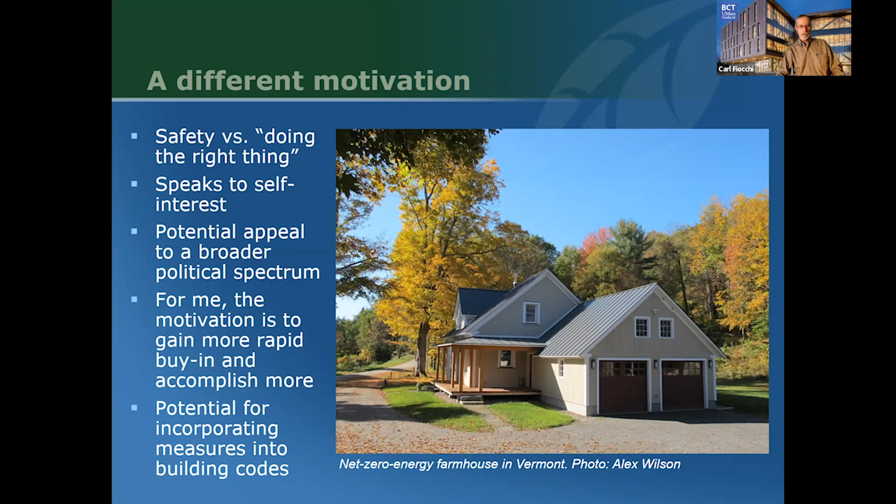Okay, so I'm going to go through some of the major impacts we are looking at with buildings and what to do about it. This is going to be pretty elementary for a lot of you, but it's a good way to review what's going on.

So first, looking at wind, designing for extreme wind. I like to show this slide. This is up in the Adirondacks, and in addition to writing about energy and the environment for years, I've written a series of books on quiet water canoeing and kayaking, and have spent a lot of time in the outdoors.

Back in 1995, we were on a canoeing trip in the St. Regis Wilderness area in the Adirondacks of upstate New York. Our last night, we'd been out about 7 days, with 2 young daughters, my wife, and another friend.

This storm came up, and my wife and I were getting ready to go out for an early morning paddle around 5:30 in the morning, and we hear thunder in the distance, and thought, that's really odd. Who's heard of a thunderstorm at 5:30 in the morning? So we debated going out and letting it pass over, but being prudent and safety conscious, we decided to pull the boat out of the water and go back to the tents.

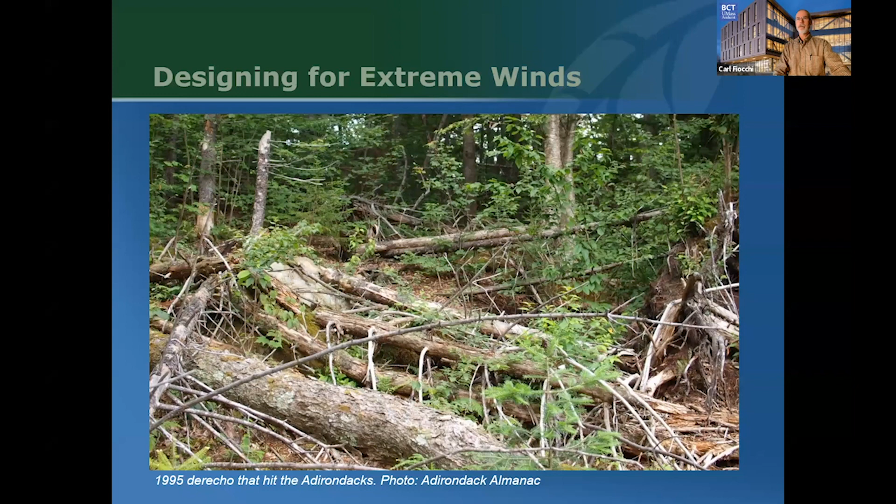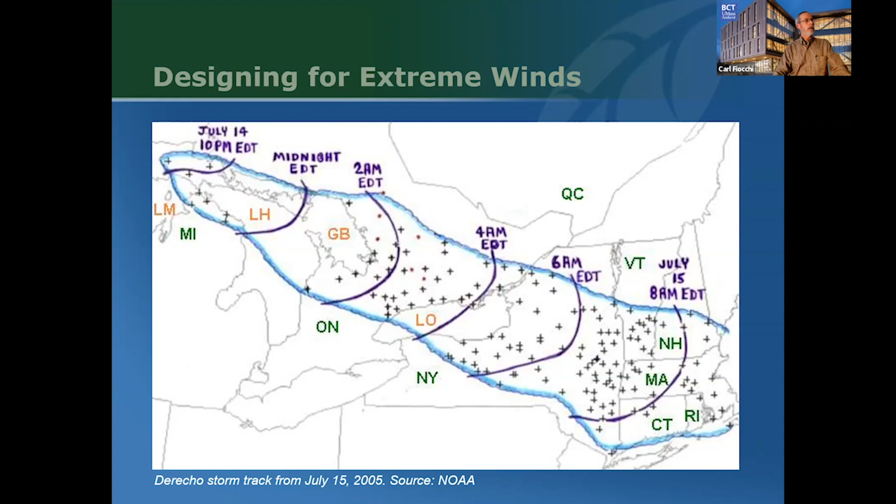It's what's called a Derecho. Until that event, I didn't even know the term, but it's a massive thunderstorm event that extends across the country. This particular storm had started in the Midwest, upper Michigan, and moved east over the span of a day. It affected Western Massachusetts very heavily and Vermont, but it really helped me wrap my mind around the need to design for wind.

So what do we do in designing for wind? I'm not going to spend much time on this, but there are a lot of easy strategies that any structural engineer will tell you about: hurricane strapping, tie-down components on light frame construction. We can look at more wind-resistant geometries, hip roofs, for example, rather than gable roofs.

Interestingly, some of the strategies to minimize wind damage, like shorter overhangs on buildings, contradict some other benefits of overhangs. I like a wide overhang to keep rain away from a building and improve its durability, and help prevent moisture from coming in through foundations. But from a wind uplift standpoint, a thinner overhang is preferential.

We can look at materials, higher strength roof sheathing, the nailing schedules or screwing schedules on panel products, exterior shutters on windows. Some of the innovative building systems like mass timber and timber framing are highly resistant to wind, very strong buildings. There's various standards we can look at, such as the fortified standards from the Insurance Institute for Business and Home Safety, IBHS, and some of the engineering codes that exist.

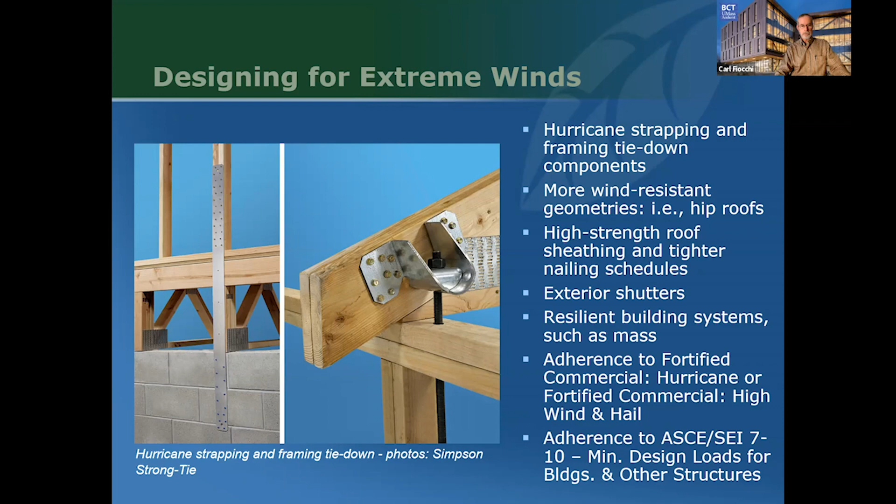Tornadoes are another form of wind, and for the vast majority of buildings, other than some emergency management buildings, we can't really be expecting to design buildings that will withstand 250-mile-an-hour winds that may be experienced in tornadoes. So with tornadoes, we instead tend to look at safe rooms, spaces within buildings that can provide a safe refuge.

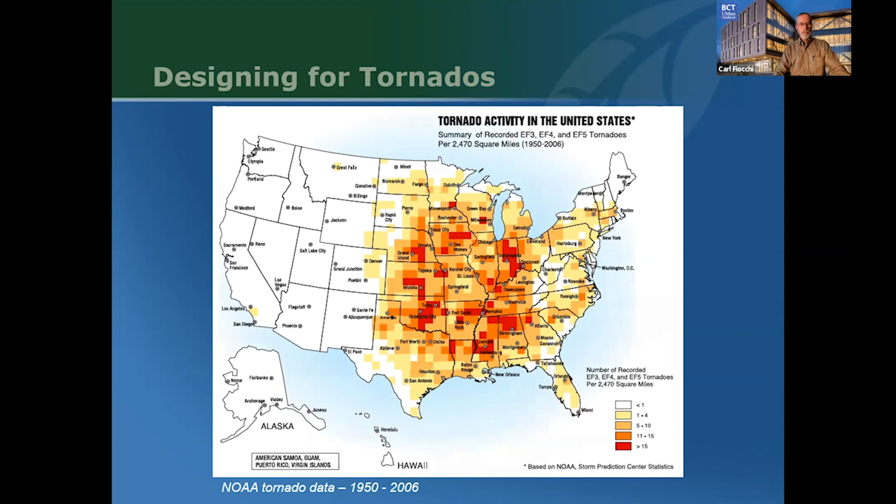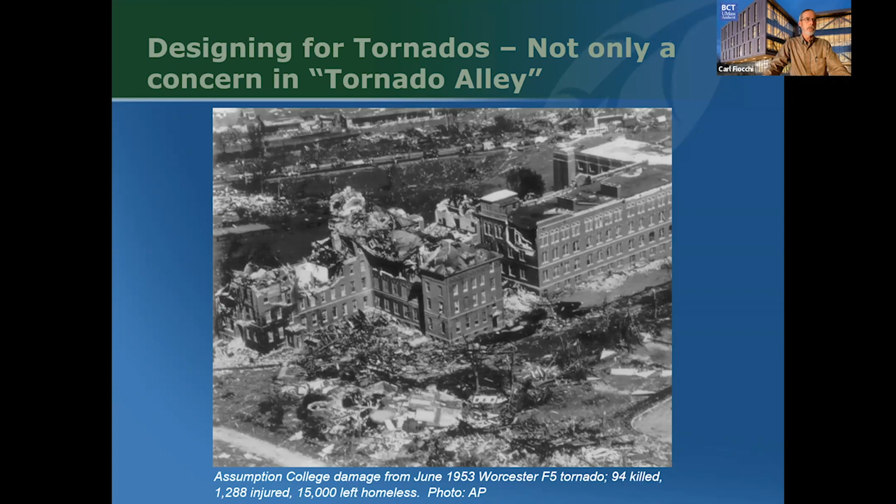So safe rooms, there are excellent standards from FEMA, the Federal Emergency Management Agency. There are also various companies that pre-manufacture safe rooms. They can be cast concrete, they can be metal fabrication, or safe rooms made with reinforced textiles, Kevlar type materials.

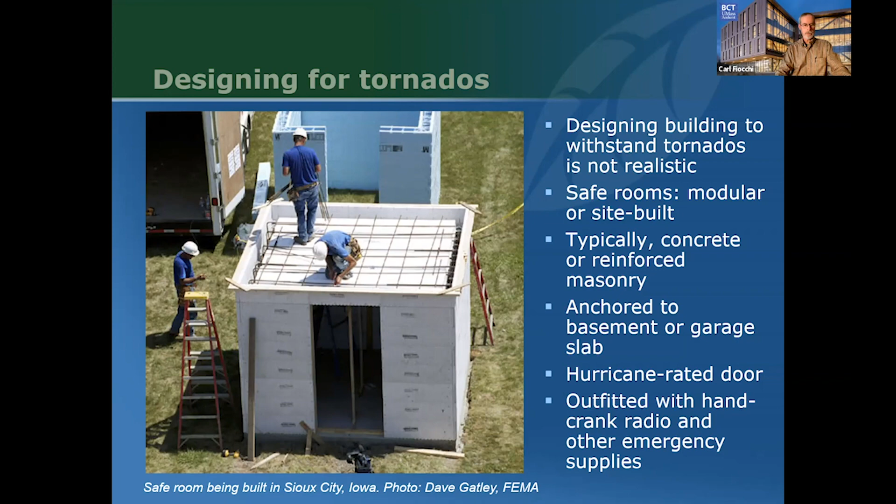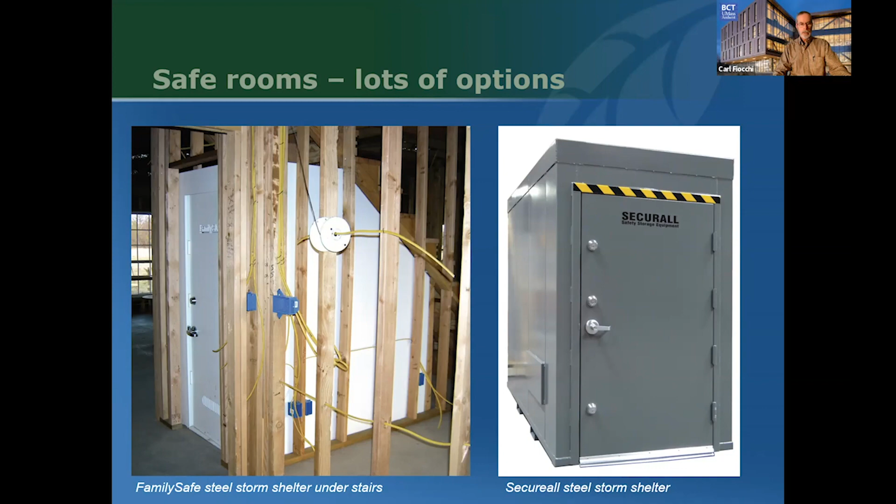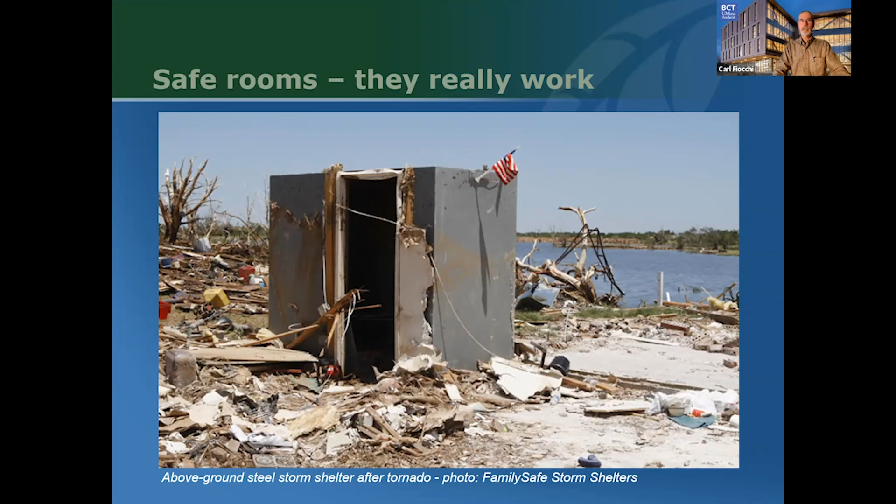Next up is flooding, something we need to think about not only in coastal areas where we have storm surge and sea level rise, but inland areas as well. Western Massachusetts and Vermont, where I'm based, was heavily impacted by Tropical Storm Irene in 2011.

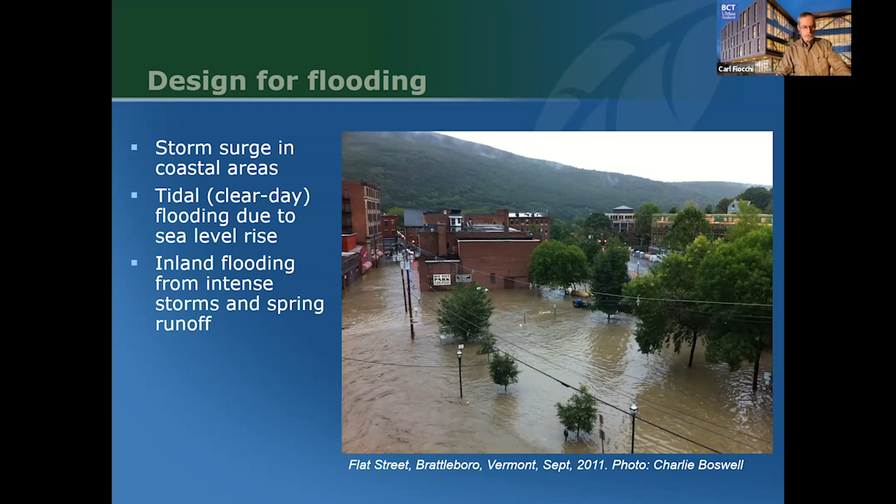Significantly, when that was built, they knew it was in the floodplain, but the lower level of the building was above the FEMA-designated 100-year flood elevation. It was out of that elevation, so they didn't technically need to do anything. But the civil engineer on the project—and I was working on this project during design, for energy reasons—thought that even though this is above that 100-year flood elevation, if the Whetstone Brook floods, we're going to exceed that. So one of the features they incorporated into this building are flood barriers on all of the exterior entryways.

They're tracks that are permanently installed, and the last person to leave that Sunday morning deployed these aluminum panels that fit into these channels and get tightened into place. Lo and behold, the stream did flood its bank and came within 1.5 inches of the top of those flood barriers. So that simple feature, which probably added a couple thousand dollars to the cost of the building, saved probably a couple hundred thousand dollars in damage had that building been fully flooded.

It's the kind of feature that can very easily be value engineered out of a building, because it's seen as an optional expense. It's not required by code, and it's not adding an amenity that occupants are going to recognize unless some problem comes up. But the owners had the wherewithal to stick with it, and certainly have benefited from that. They did go back and add another 4 inches to the freeboard on these, looking at the potential for future flooding.

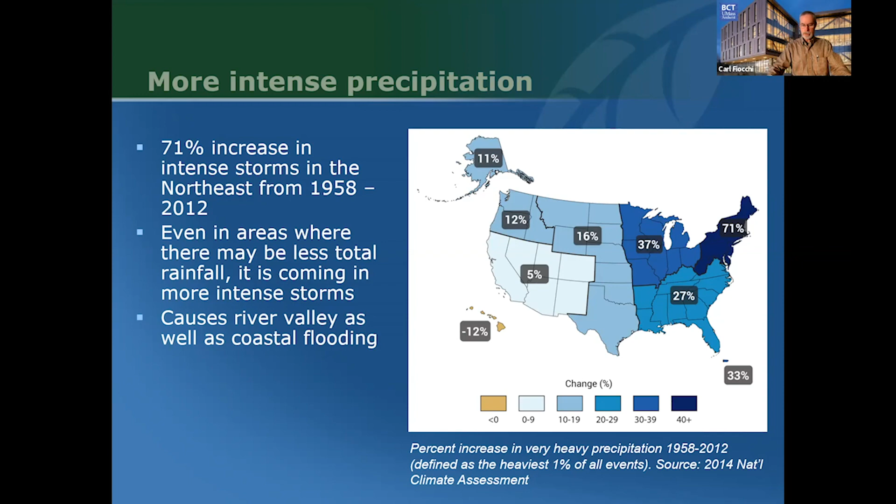Flooding like this isn't limited to Florida. Along the eastern seaboard and parts of the West Coast, we're also going to see significant changes to the coastal zones. Interestingly, in this part of the country, the inland Northeast, we're among the best off when it comes to the changes expected over the next 50 to 100 years. So a lot of people looking ahead are expecting climate refugees coming to Western Massachusetts and Vermont from New York City or coastal New Jersey—areas that are going to be increasingly flooded.

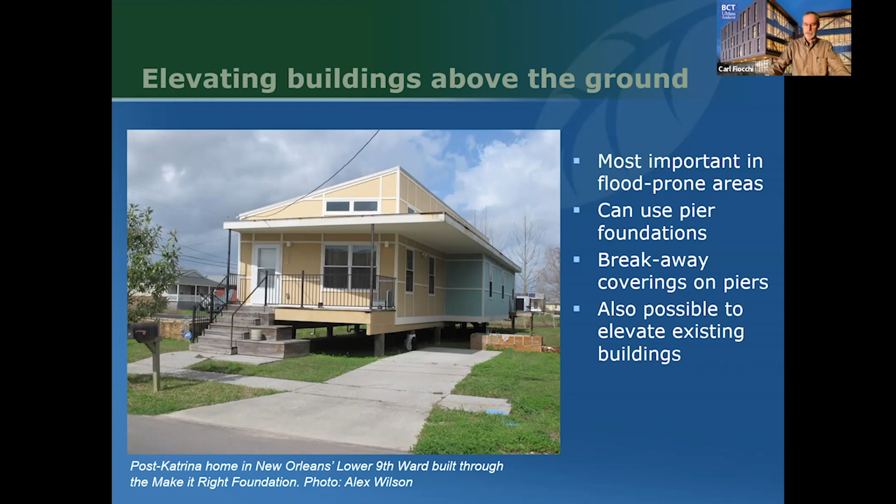Using pier foundations, using breakaway walls that protect these underfloor areas, so that if floodwaters do come through, they don't take down the building, they simply flow past the partitioning. In addition to elevating buildings, we can look at elevating mechanical equipment, whether it's mechanical equipment outside the building or inside the building.

With Superstorm Sandy in 2012, New York City saw extensive damage to mechanical equipment in basements. Since that time, there's been a lot of effort to elevate that equipment, either into penthouse floors or rooftop locations.

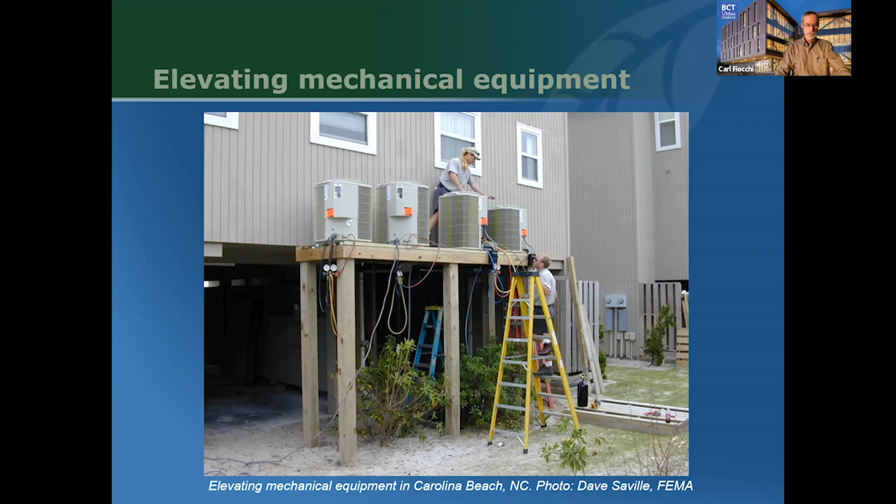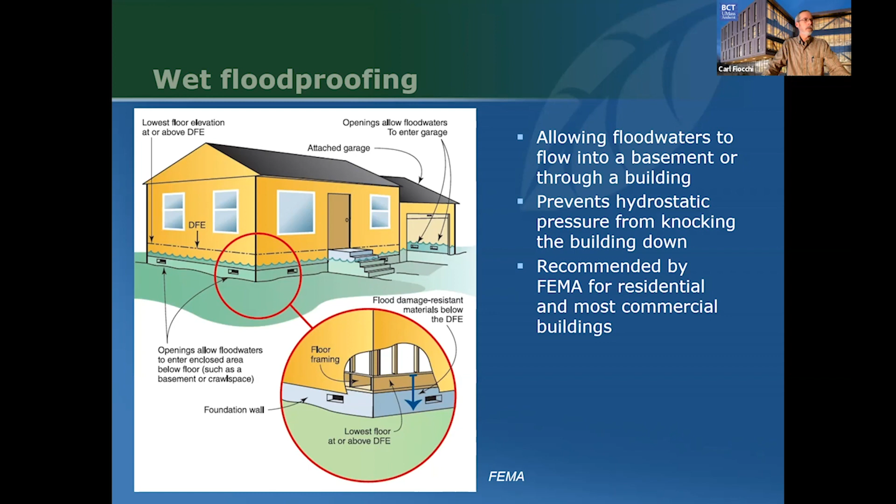With flood design, we talk about wet flood proofing and dry flood proofing. Wet flood proofing is kind of a funny term - it seems like an oxymoron, but it's flood proofing that's designed to let spaces get wet. So allowing floodwaters to flow through a building, whether it's through a crawl space or even a first floor of a building. What that does is protect against the hydrostatic forces that work against a building from knocking it down. FEMA really recommends wet flood proofing in most residential applications and in a lot of commercial applications. Unless a building has been specifically designed to withstand those hydrostatic forces, wet flood proofing is typically the desired method.

One of the strategies is these intentional openings that equalize pressure within a building. These flood vents, made by a number of manufacturers, have a normal position that's closed, but if floodwaters rise, the vents lift out of a channel and are able to pivot back and forth to let water flow in or out.

So an ingenious system to, in normal conditions, keep rodents out and provide security, but if there is a flood event, allow that movement of water in and out, which equalizes pressure. I've talked to people at FEMA about this, and with Sandy in particular in New York City, where there are thousands of row houses and walk-ups that are 4 to maybe 8 stories tall, often brownstone buildings - those are unreinforced masonry, and FEMA's very worried about those.

If we do a lot of work to keep those floodwaters from filling up those basements during a flood, there's a lot of risk that the buildings could come down. Significantly, when so many buildings' basements were flooded during Sandy, the strategy to fix that isn't necessarily to go right out and pump the water out. That has to be done very carefully, dewatering all of those basements at the same time. If one gets dewatered, the hydrostatic forces on the basement next door could knock that partition foundation wall down. So a significant issue with wet flood proofing.

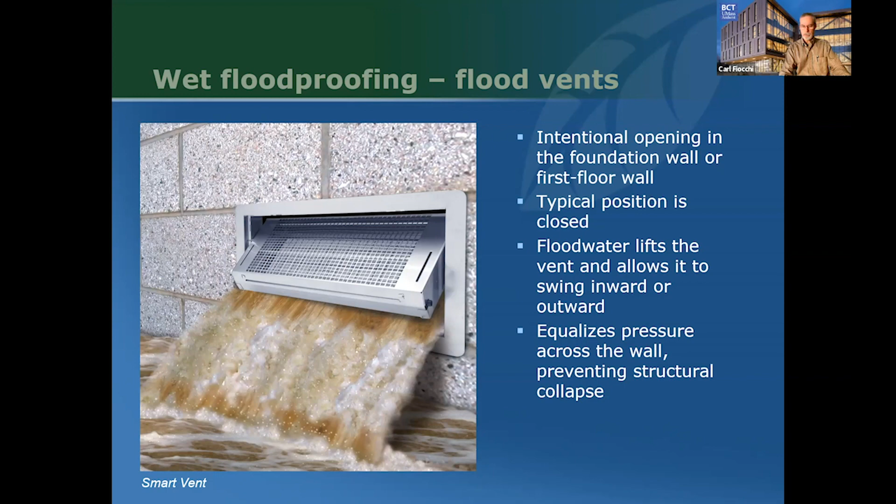We also, with wet flood proofing, want to look at wettable materials. By that, we mean materials that can get wet and dry out again without having to be replaced, like polished concrete, where the structural floor slab becomes a finished floor. It also offers cost benefits to using structure as finish.

Wall materials that are tile or brick, or gypsum - fiberglass clad gypsum instead of paper faced gypsum board. These types of materials can save a lot of money if a building gets wet. If a cellulosic material gets wet, it usually has to be taken out and thrown away, dumped in a landfill, because of mold growth that happens within a day or two of a flood event.

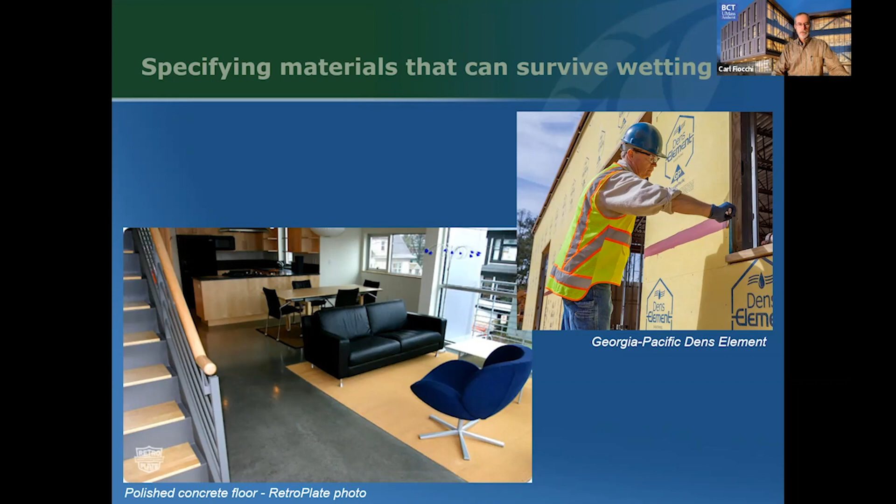Okay, so now dry flood proofing, and that's this idea of keeping water out of a building. There are places where that makes sense, and there are a lot of buildings where it's okay to keep a little bit of water out - a foot of water or so, as was done in that building in Brattleboro that I showed off.

This pictured here is a commercial building in Providence, Rhode Island, an older building where they retrofit these channels to be able to apply these flood panels in advance of a flood.

In buildings being built new, the entire building can be engineered to withstand, to protect, several levels of sub-basement, keeping water out. But those have to be engineered for that use right from the start.

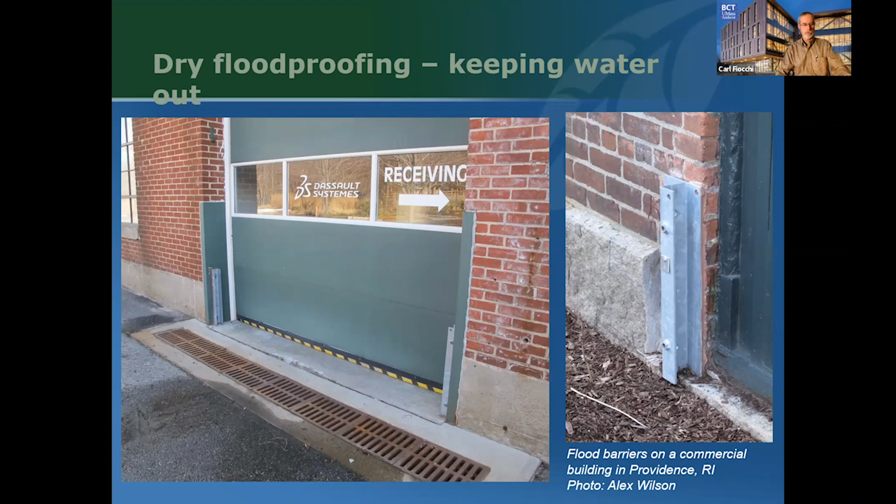Flood proofing guidance, FEMA has great stuff that's available free. FEMA's been one of the most amazing resources for decades, just a wealth of information in their library resources.

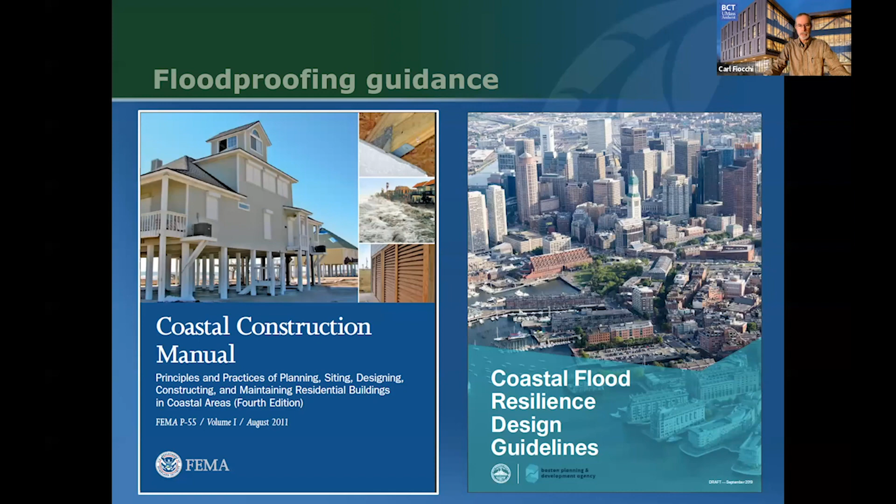Boston has this coastal flood resilience design guidelines that came out a couple of years ago. Really good stuff, and I'd urge you to take a look at that. That's from the city of Boston.

Okay, next up is wildfire. Wildfire is certainly something we've been hearing about a lot over the last five years, particularly in California.

At the end of last year, that devastating urban firestorm in Colorado made the national news and front pages. Very quickly, in a matter of an hour or two, it took out close to 1,000 homes.

But more common is wildfires, not in suburban areas, but in areas that have been developed that are an ecosystem typically managed by natural fires, lightning-started fires. We're building in places where maybe we shouldn't be building because of that vulnerability to wildfire, but we're doing it. And there are ways we can learn to do it better.

This map shows the wildfire activity over the last 20 years or so, from 1994 to 2013, by county. You can see the risk is largely in the west, or it's greatest in the west. But as precipitation patterns change, there might be more times when we're dealing with drought and wildfire, even in the eastern part of the country.

So in terms of what to do about it, I mentioned IBHS earlier, the Institute for Business and Home Safety. That's the research arm of the insurance industry, the home insurance industry. And they've done really good research on fire safety and fire-safe building practices.

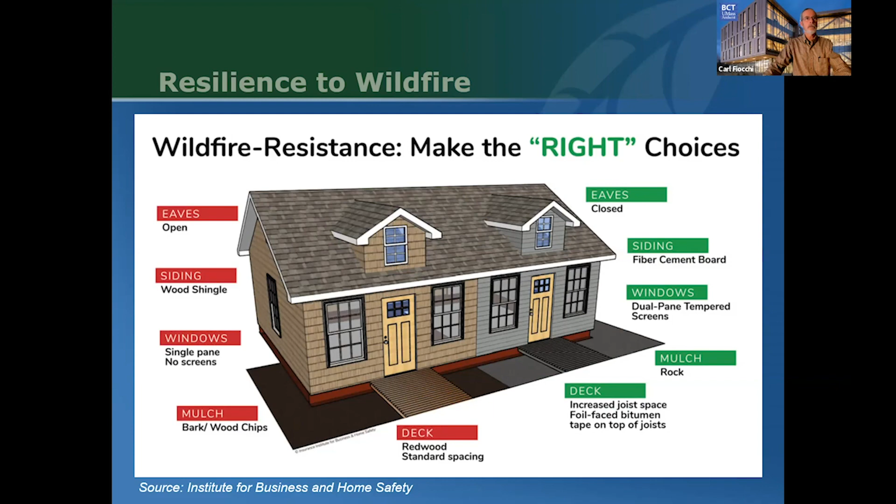This slide, you probably can't read too well, but it's just a sampling of strategies. A lot of people assume that homes burn down in wildfires because the fire comes right up to the building and catches it on fire. More typical is that embers, well in advance of a wildfire, get swept up through soffit vents in the roof at the eaves and catch the building on fire from the inside. So there are simple strategies for preventing that with proper ember-excluding screening on eaves.

IBHS in South Carolina has an amazing research facility that I haven't yet visited, though I'd love to check it out. They can build a full-size house in this big test chamber and then expose it to all kinds of impacts of Category 5 hurricane, driving rain, very high wind, and wildfire. This is a test case, a building they built where half of it was built to standard practice and the other half built to more fire-conscious standards. Then they can expose it to these fire conditions.

You can see in the lower right, it's kind of hard to see, but there are embers being shot at the house. There's an ember generator - I don't know how they do that - but it's blasting the house with these airborne embers in high wind.

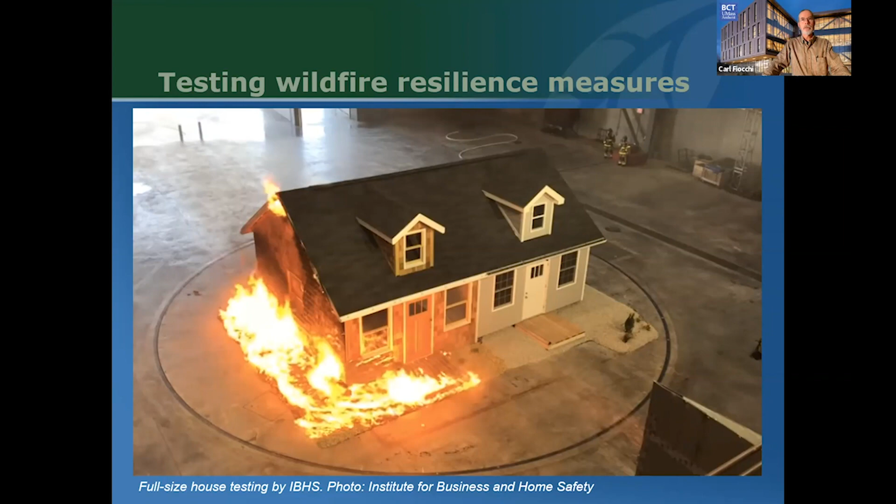So examples: open eaves pose a greater fire risk than if they're boxed in. Very significantly, wooden decks are a very common cause of structural fires in buildings. Open decks tend to accumulate a lot of debris, vegetation will grow under them and then die, leaves will accumulate. And again, these embers, well in advance of a fire, land under that deck, catch it on fire, and burn the house down. So there are smarter ways to do that.

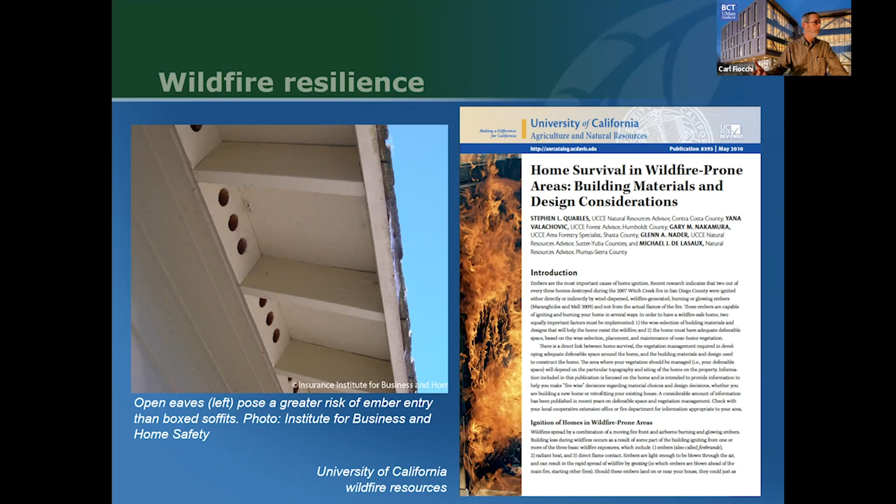And there's some great resources. University of California, Berkeley has very good resources in firewise design. And it's not just the building, it's the way the landscape is managed to minimize fire risk.

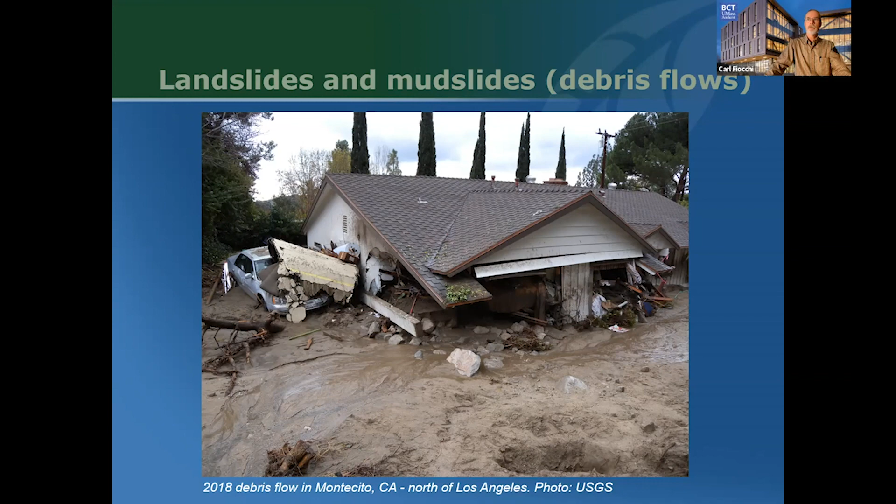Landslides and mudslides, sometimes called debris flows, are very commonly a secondary impact of wildfire. An area gets affected by a wildfire, and then weeks or months later there's a heavy precipitation event, and the soils are destabilized because the trees growing on them have been killed or disturbed. Then you get massive debris flows, like this one in Montecito, California, which was very much in the news in 2018 - I think there were maybe 20 people killed during that event. It came down very suddenly. We hear a lot about mudslides in other parts of the world, less developed nations, but they happen in the US as well.

Fortunately, there are now some resources where the US Geological Survey is doing mapping of debris flow risk. This was an image I showed at a workshop we participated in in Malibu, California, after the wildfires there, developing strategies for the rebuilding that would happen, and how to reduce the fire risk. This map shows relative vulnerability to debris flows, but it's generalized a little bit - it's very localized depending on the slope and the valleys and so on. But there is now, just within the last few years, much more focus on this by the U.S. Geological Survey.

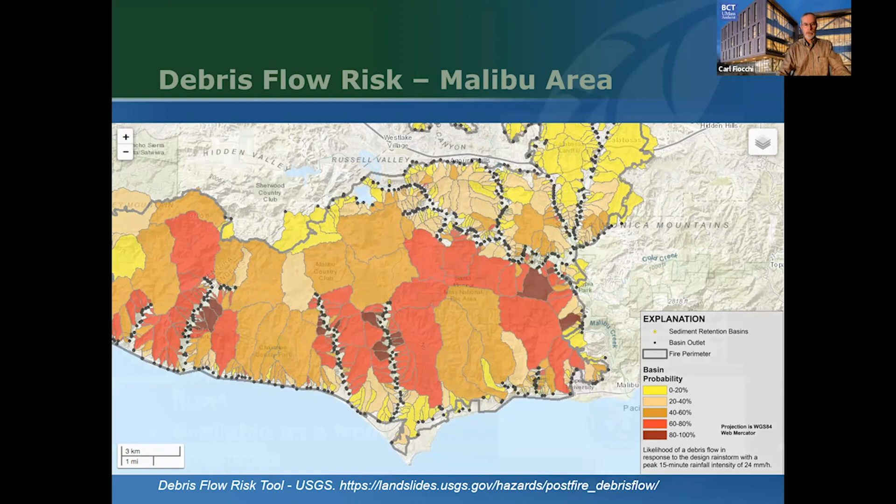Next, I want to talk about temperature extremes. And when we're looking at disasters, surprisingly to a lot of people, it tends to be heat waves that kill more people than any other disaster. So it's a very serious issue.

There was a widely publicized situation in 1995 in Chicago where close to 800 people died. Then in 2003, several tens of thousands of people died in Europe when a 2-week-long heat wave lasted. In Europe, the typical houses there were high mass buildings, and thermal mass can be great in terms of stabilizing temperatures over a period of time. But this heat wave lasted 2 weeks and it didn't cool down at night. Typically where mass buildings make so much sense, we have a big diurnal temperature swing and the mass cools down at night. If that doesn't happen, the temperature of those buildings can keep going up and up.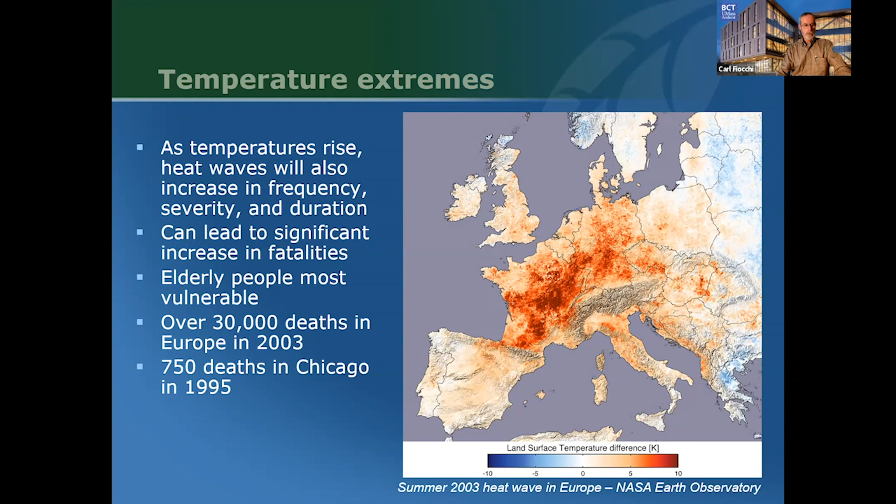And that's what happened in Western Europe. So there's a lot to learn from disasters like that. Last year we saw that outrageous heat wave in the Pacific Northwest. There were places where the all-time record temperature was exceeded by more than 10 degrees Fahrenheit, which is remarkable when you think about records going back 100 years or more. Normally records are broken by a degree or a fractional degree, but to have records broken by 10 or 12 degrees is really extraordinary. A lot of that was in Canada, areas that usually don't have air conditioning.

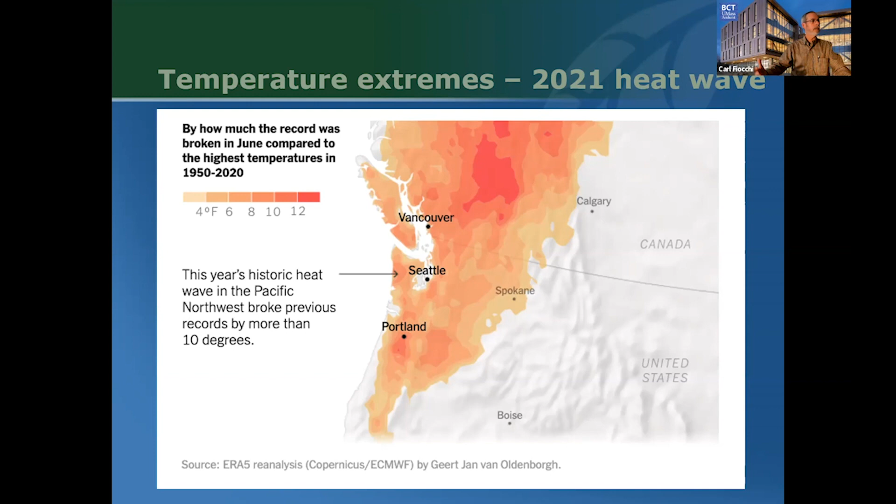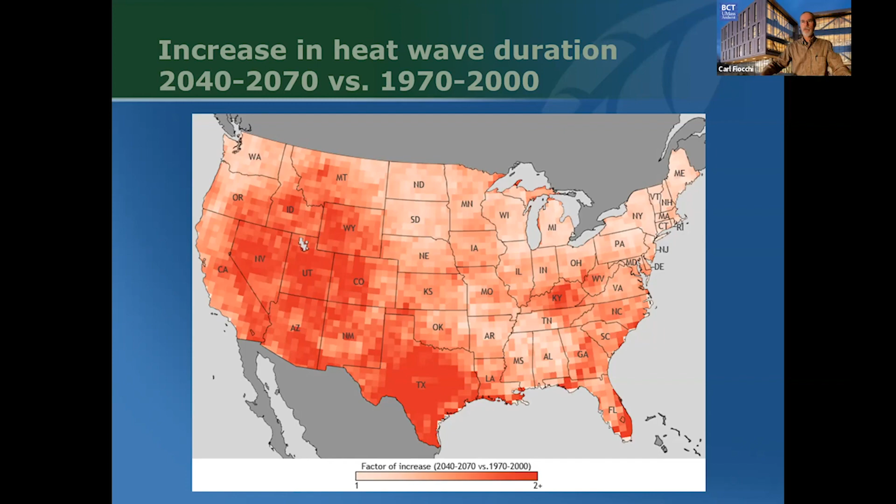So we need to be thinking about how to keep people safe in those buildings. There are increasingly available projections of what we're going to see in the way of more severe and longer duration heat waves in the coming decades. This is material, a map from climate.gov, US federal government information, that's mapped these vulnerabilities. We're looking at, in many parts of the country, a 2-fold increase in these extended heat waves over the coming decades.

Part of the solution for increased heat, higher temperatures, is design of our mechanical systems. This is our own home - I think in my second or third slide there was a photo of our house, I forgot to point that out - a net zero energy retrofit of our 200-year-old home in southern Vermont. This is the interior, and we insulated the home well enough that we heat the entire house with just this single air source heat pump, which is right here, an 18,000 BTU per hour air source heat pump, or mini split.

We don't have any heat upstairs. It's a central stairwell, and the upstairs bedroom rarely drops below 65, even in the winter. We do have a small wood stove, so we can supplement that air source heat pump when we need to, and we use it periodically - I think I went through maybe a third of a cord this winter so far, but it's fairly modest, almost as much for aesthetic reasons as temperature reasons. But in the event of a power outage, and I'll be talking a lot more about that later, having that additional heat source is very important.

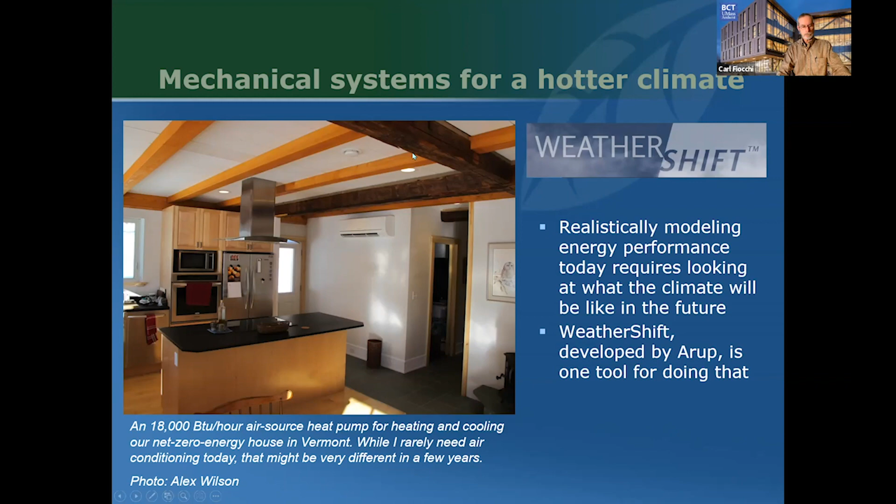Okay, drought and water shortage. This is another issue that's been in the news a lot. We see places like Lake Mead, the nation's largest reservoir, being at roughly half capacity in recent decades. We see places like Lake Lanier in Atlanta, which provides 90% of the fresh water for the city of Atlanta.

In 2007, the level got down to a 30-day water supply for the city with really no backup plan if that water level dropped further. The governor famously urged people to pray for rain, and apparently that worked. It did start raining and recovered some of that reservoir, but it's a vulnerability that exists there, even in the east.

The West is much better prepared to deal with extended droughts. Lake Mead is a very deep reservoir that has several years worth of water, even if there are no additional inputs into it. The reservoirs in the east tend to be much shallower, with much less storage capacity.

There's a great resource, the National Drought Mitigation Center at the University of Nebraska. You can download these weekly drought maps of the US. The larger map shows drought conditions in the US last week, and the smaller map shows what they were a couple of years ago. I showed the two maps just to show how much these conditions change.

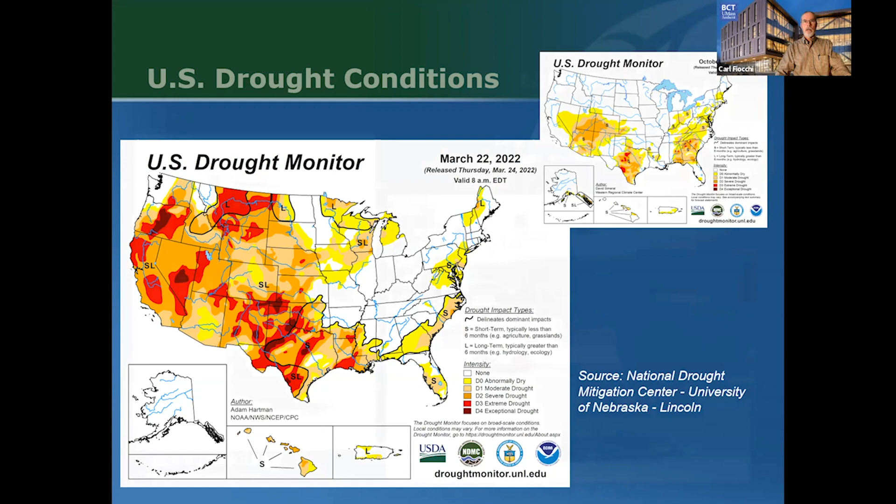So in terms of what to do about drought, the first place is water conservation practices: low water use toilets and plumbing fixtures. Fortunately, the WaterSense program has really made that pretty easy for us. Simply buying WaterSense listed appliances and plumbing fixtures is a great place to start.

You can go further. The toilet there is a 0.8 gallon per flush toilet made by Niagara. There are very good shower heads too. The shower head on the upper right is one that I've used for years at 1.5 gallons per minute flow, well below even the WaterSense requirement for water conservation.

And then in dry areas, look at landscaping. I can't say I really like the appearance of the landscaping shown there with different colored rocks, but it does use very little water.

I took that photo in the Phoenix area when I was on a bike trip in 2011. Not far from there was a development where every house had a boat dock, and the whole area was using water from the Colorado River for a kind of resort community where people could keep their boats in Arizona.

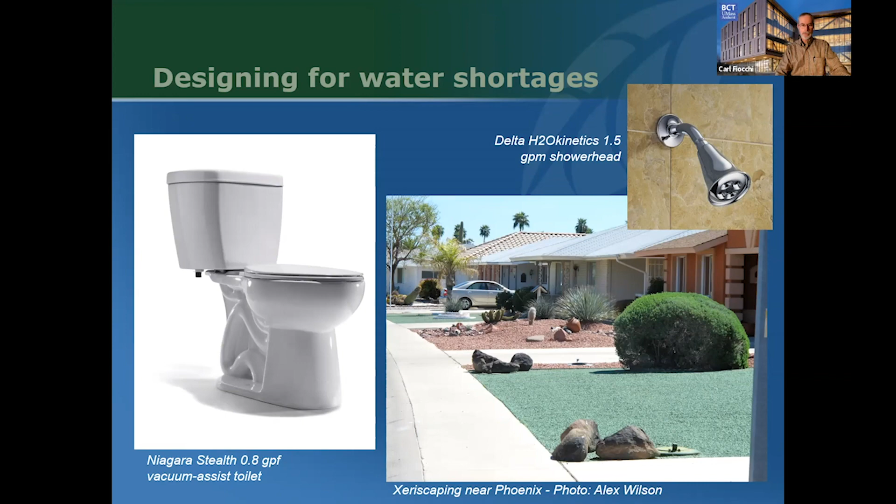As the climate changes, there are some other effects we tend not to think about too much: insects moving north, termite ranges extending into areas that didn't used to exist.

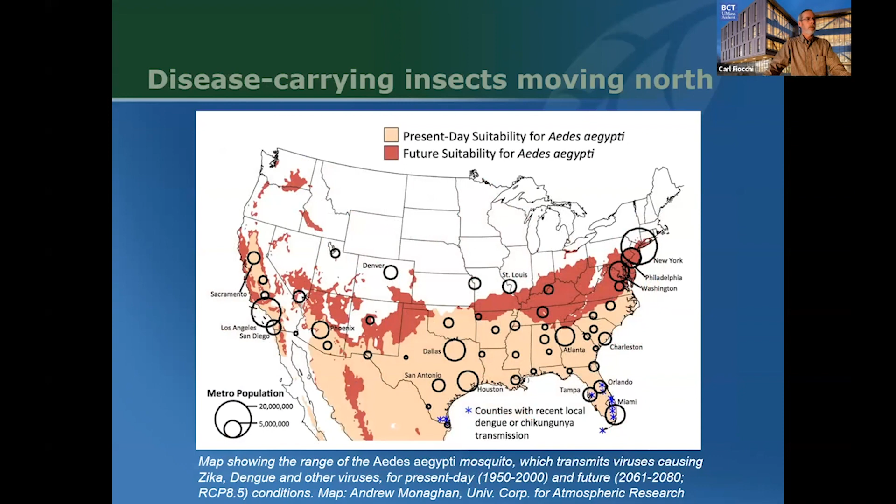There are mosquito ranges moving north that'll bring various diseases borne by mosquitoes. And these moving ranges call for paying attention to how we design our buildings to exclude insects.

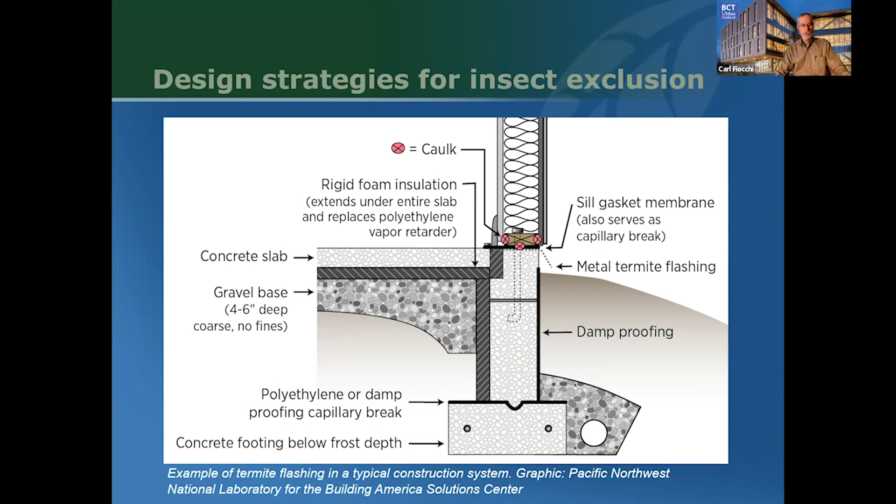Certainly wood-boring insects, but we can also look at screening systems. Larsen Storm Windows, a large manufacturer of storm windows and screens, has a great system with roll-down insect screening, where the screen rolls up into a valance at the top of the window.

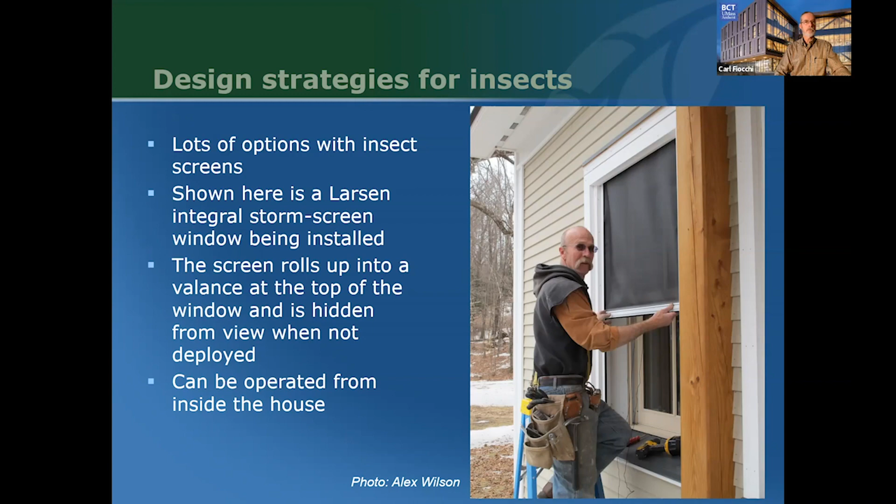These are being installed at our house, where we did a super insulated retrofit. We had the prime windows, which were double glazed low-E argon, so good performing windows, but then we added low-E storm windows on the exterior of that. So we have effectively triple glazing with two low-E coatings. Those low-E storm windows have integral screens that make it really easy, from the inside, to deploy those screens.

Okay, I'm going to shift now to heat, specifically power outages and what we need to do to focus on that. I'll spend much of the rest of my remarks this afternoon on this idea of passive survivability - the idea that we should be designing buildings that will keep their occupants safe in the event of loss of power.

There are various news events we hear about, like the situation in Florida in 2017, where there was a storm event and backup power systems didn't work in a nursing home, and 14 elderly residents died from heat there.

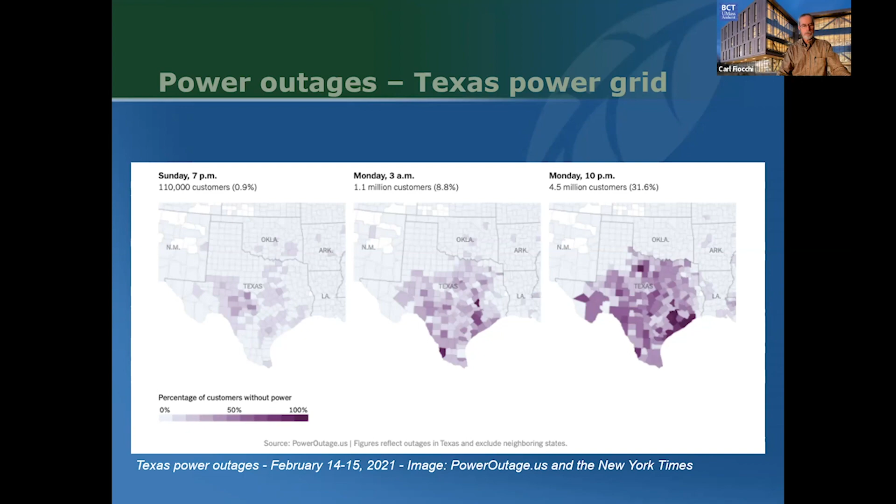The maps here show the percent of customers without power, and the darker purple there is 100% without power. The lighter purple, more like 50%. So pretty significant impacts, and that was at a time when temperatures were pretty extreme. A lot of people have electric heat, so there was a lot of hardship because those buildings weren't designed to function without power. There is a lot of vulnerability in our energy grid, both electricity but also natural gas and other fuels that get transported around the country.

A lot of people also don't realize that severe drought can put power production at risk. 89% of US electricity generation is with what are called thermoelectric power plants. These are power plants that use some heat source, whether it's natural gas, coal, nuclear, or oil, to heat water, creating high pressure steam. That steam has to be condensed back into water, and so they require cooling water. In a severe drought, if those power plants lose the cooling water, they shut down. In that extensive heat wave in Europe in 2003 that I showed a map of, they lost, I think, 12 power plants because of loss of cooling water. So it can be quite significant.

With power loss you have these cascading impacts, like gasoline stations unable to pump fuel because they may not have backup generators. That's another issue that gets at resilience, but I'm not going to dwell on it this afternoon.

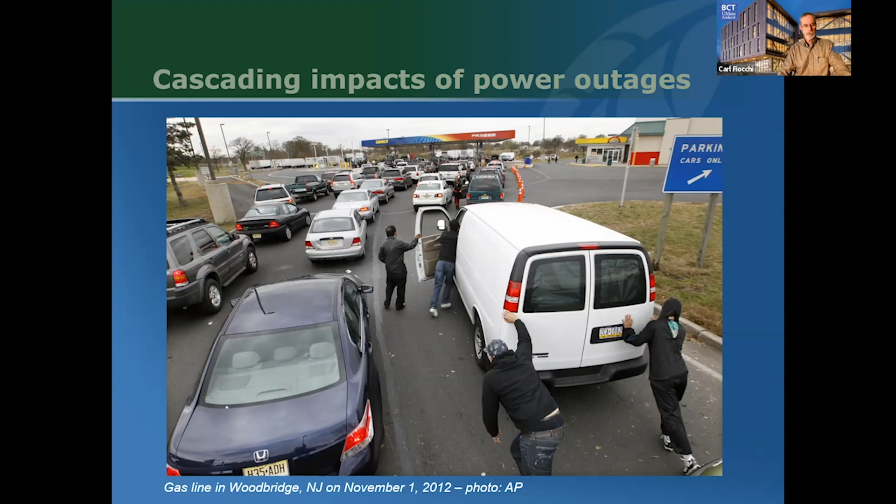These are buildings that are, as built today, typical building stock. If instead we look at buildings built to state-of-the-art, or at least pretty good energy standards, model energy code, the speed at which the temperatures decay is much more gradual. So those buildings keep people safe for far longer.

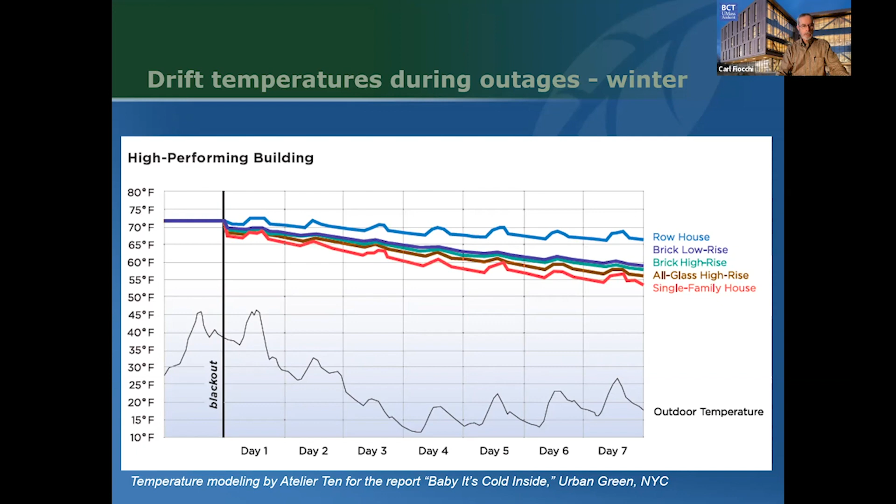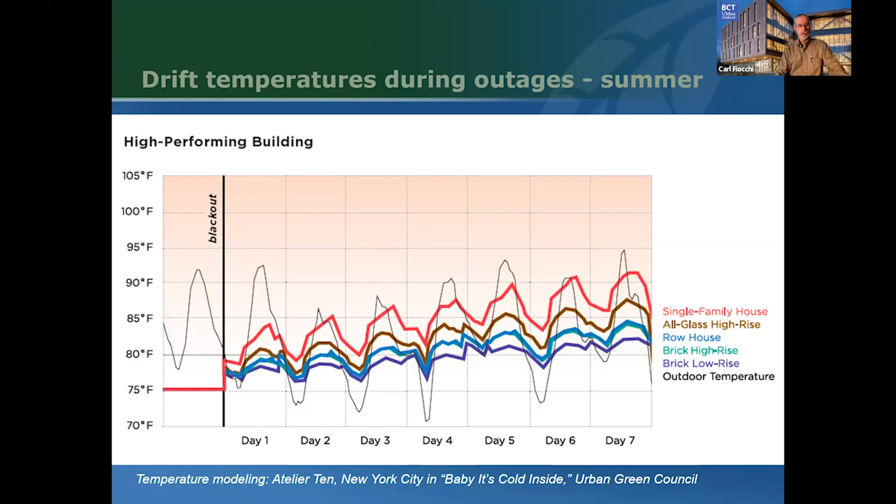Again, we can look at the thermal modeling if the buildings are built to better energy standards. We can then go further and look at passive house design. This is a streetscape in Brooklyn, and you can pick out the house that was retrofit to passive house standards in this thermal imagery, where the oranges and yellows show a lot of heat loss from that building, and blue shows very little heat loss. That building in the center is built to certified passive house standards.

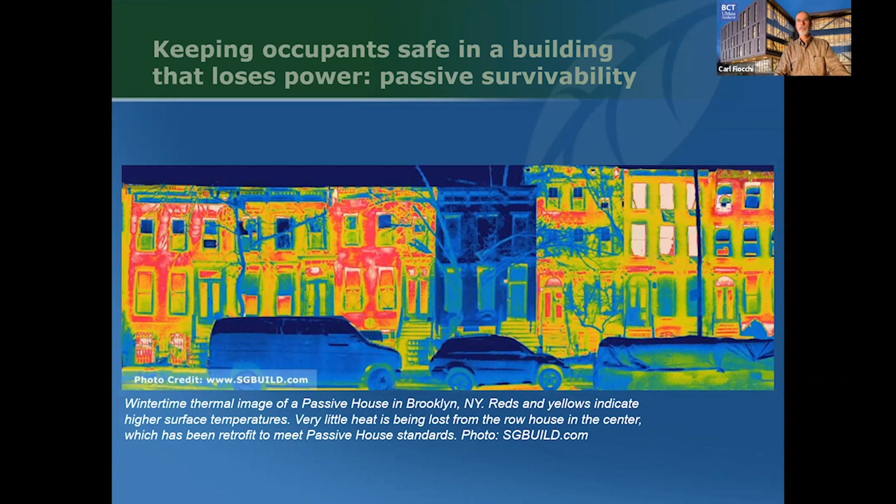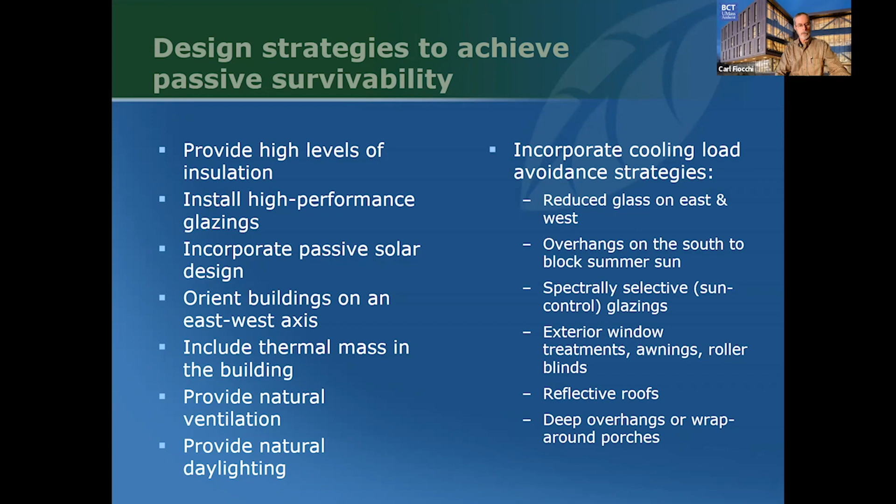In terms of achieving passive survivability, there are a lot of strategies that have really been at the center of the green building movement for several decades now, and before that, the passive solar movement and the energy efficient construction movement. It's smart building, high levels of insulation, high performance glazings, incorporating passive solar design with features like thermal mass and south facing glass. It's the way we orient buildings, design for natural ventilation, daylighting, specific strategies to reduce solar heat gain like reflective roofs, and minimizing glass on the east and west where summertime overheating tends to be greatest. These are common sense design standards that are hopefully now more ingrained into building design today, and I think UMass's program of instruction is very much involved with that and very state of the art.

The specific idea of passive survivability emerged out of work I was involved with following Hurricane Katrina in 2005 that hit the Gulf Coast. We saw thousands of people being evacuated to the Superdome when their homes were flooded, and then a day later having to be evacuated from the Superdome because it was 110 degrees in there and 95% relative humidity.

Similarly, older homes that weren't flooded but lost power did a lot better than newer homes. Homes built prior to the 1940s in the New Orleans area used vernacular architecture, designed for that bioclimate. They had features like wraparound porches that shaded the windows from direct sun, were designed to channel breezes through the buildings, and often had higher ceilings to provide stratification within the house. After Katrina, some homes were without power for weeks, in some cases more than a month, and those older homes tended to do better.

So we reasoned, with this series of design charrettes following Katrina, that Katrina wasn't going to be the last storm that caused extended power outages. Shouldn't we be designing and building today homes that do at least as well as the homes our grandparents were building? That was the idea, and it became one of the 10 principles of the New Orleans principles of providing for passive survivability. It really is what got me focused on resilience, because I saw this as a strategy for getting more people to do green building.

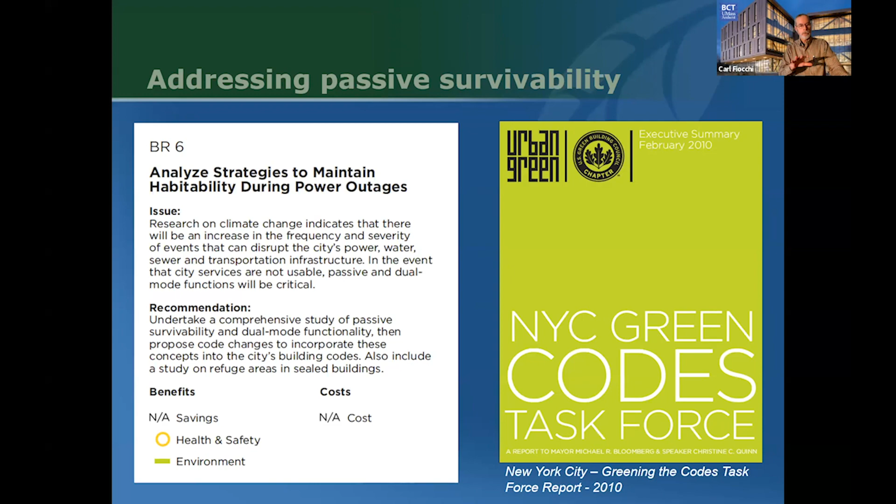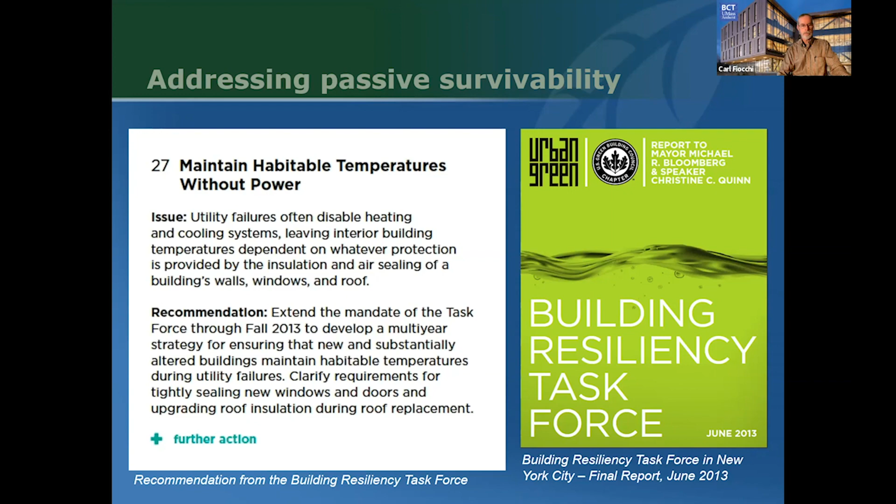We didn't get very far in 2010 - there was just a recommendation to look into the issue. But then years later, when Sandy happened, there was another committee put together that I was part of, the Building Resiliency Task Force. This became one of 33 specific recommendations that came out of that effort, to maintain habitable temperatures in buildings that lose power. So that's out there as a strategy. It hasn't been implemented in building codes yet, but at least it's being talked about now and seeing the light of day.

Meanwhile, we worked on incorporating passive survivability into a suite of pilot credits we developed for the LEED rating system - that's Leadership in Energy and Environmental Design. LEED is sort of a metric for how green a building is. This building, for example, is certified to LEED Gold. There are different levels: platinum, gold, silver.

So the Resilient Design Institute led an effort to develop pilot credits looking at resilience, and we have this credit. To develop that credit, we had to come up with a methodology for measuring what the passive survivability of a building would be. It's a kind of complicated system that I won't go into here, but it became at least a placeholder for defining what the habitability zone in a building is.

We came up with 54 degrees to 86 degrees standard effective temperature, which is a somewhat different metric than air temperature - it factors in relative humidity. Because if you think about it, a building at 90 degrees in Tucson is going to be way different than a building at 90 degrees in Atlanta due to the humidity. If it's low humidity, your body evaporates water and it cools you off. If you can't evaporate that moisture, health problems can ensue.

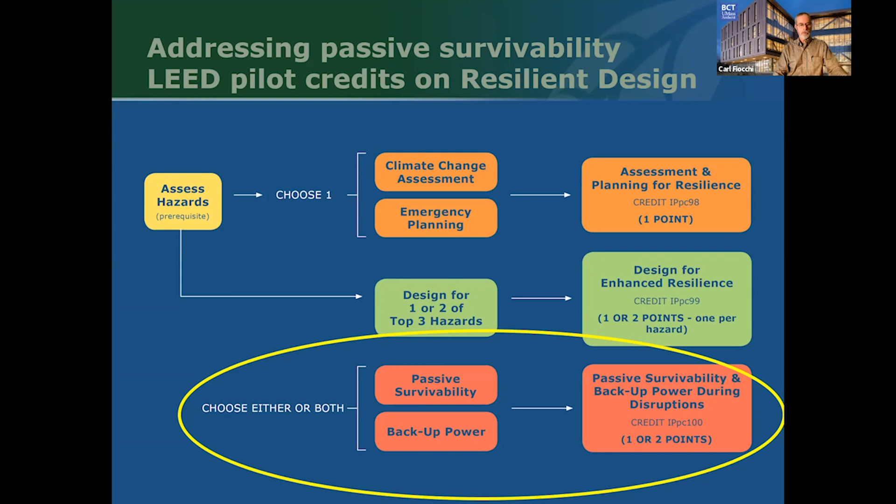I'm really excited to report that, after I badgered the Department of Energy for years to really take this concept and put some teeth into it, some meat on the bones, and do the research needed to figure out if we were using the right methodology, there's now a working group that DOE organized with participation from 3 national labs: NREL, Lawrence Berkeley National Lab, and Pacific Northwest National Lab. I've been part of that committee for a year now, and here's a presentation from a couple of weeks ago on the latest thermal modeling they're doing.

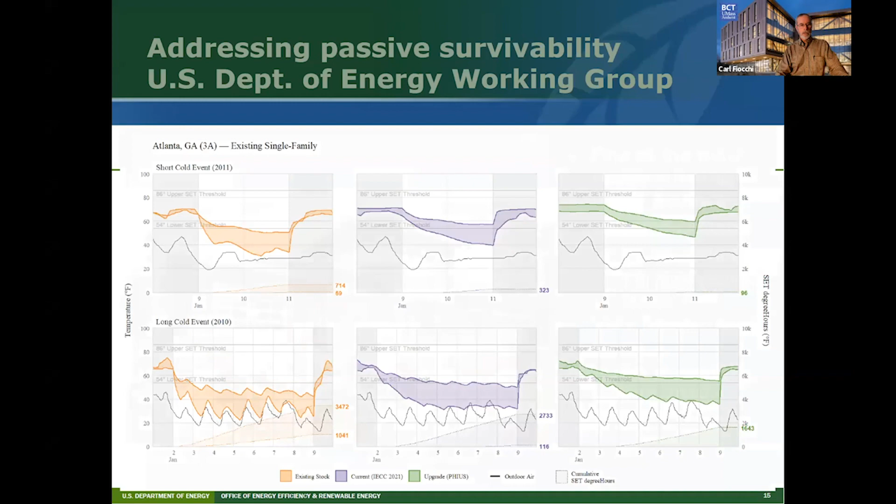Somewhat to my frustration, they've started with the assumption that 54 to 86 degree SET temperature is the right threshold of safety in buildings. I wanted DOE or ASHRAE or someone else to really examine that with physiologists. We need to keep it simple, even though a person's health condition, weight, and age very much affect what becomes too hot or too cold. We need some way to define that if we're going to put passive survivability into building codes. So it's out there, there's work being done on it, and hopefully we'll see some code language coming out of that over the coming months.

I'll end this afternoon with a few quick images of a couple of resilient buildings that tell a fun story. This is a home in far northern Quebec, an extreme climate—we're talking over 10,000 heating degree days, Fahrenheit heating degree days, and very high snow loads.

The owner of this home, a guy named Alain Hamel, had been through 2 major disasters—the first billion-dollar natural disasters in Canada's history, and both of them hit that area of northern Quebec. He vowed that if he ever built a new home, he was going to build one that would keep him safe. So he built this pretty amazing house by our standards.

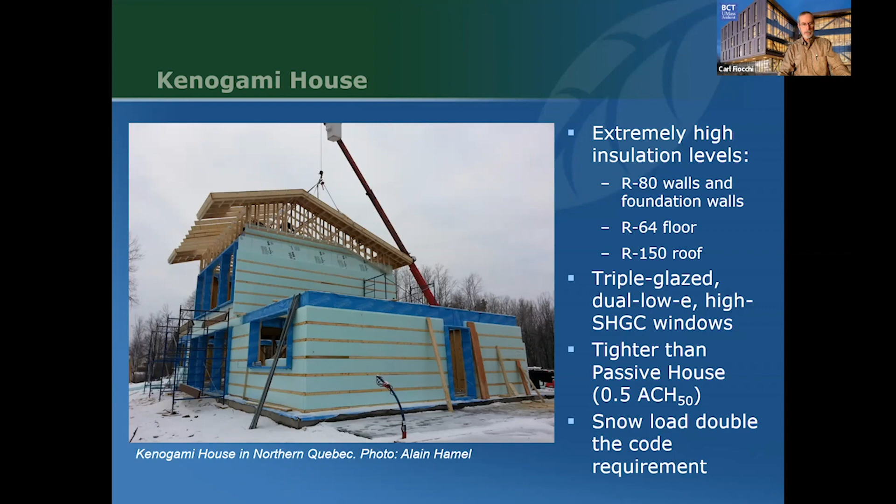It has R80 walls, R64 floors, R150 roof, triple glazed, dual low-E, high solar heat gain coefficient windows throughout—tighter than passive house standards, with double the snow load capability relative to the relevant code. In the interior, he used extensive thermal mass. He's got backup wood heat, and solar, electric, and battery storage. He pulled out all the stops in creating what I called the most resilient home in North America.

So it's an interesting case. The last project is a hospital in Charlestown, part of Boston—Spaulding Rehab Hospital. This is a new building built about 10 years ago. It's right on the water, so they knew from the start there were flooding issues. It's a spinal injury hospital, and water sports is a key part of their therapy, so they valued that site on the water, but they went to significant measures to protect the building from flooding.

Very significantly, when the architects at Perkins and Will were first beginning work on this building, Hurricane Katrina happened. They were reading in the news about a hospital where they weren't able to evacuate patients, and patient rooms got up to 105 degrees because the windows couldn't be opened and they lost power. Nursing staff were taking chairs to break windows to try to keep patients alive. So a pretty dramatic impact, and they took that to heart in designing Spaulding Rehab.

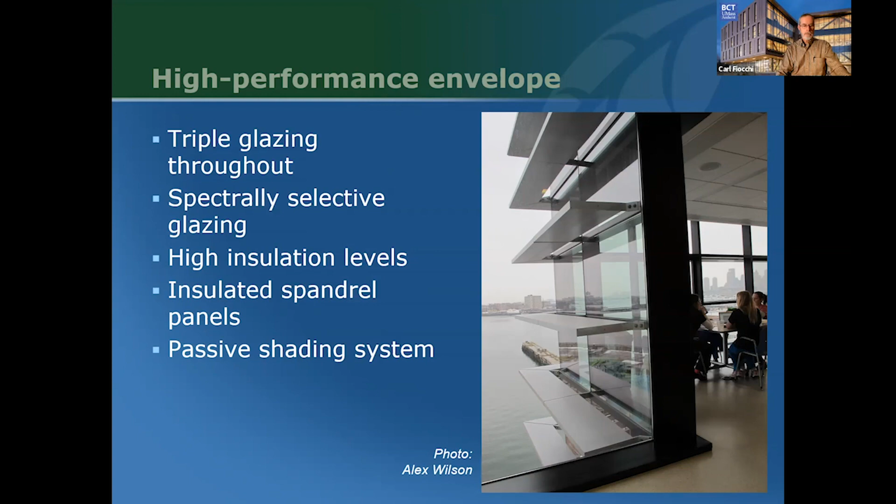The entire first floor of the building is about 30 inches above the 500-year flood elevation, but even so, the entire first floor is designed to be floodable. They've got therapeutic pools, which are well designed to get wet, but all the rest of the surfaces are tile or polished concrete, and the window frames are fiberglass or aluminum. So it's well designed to keep the building safe. All of the mechanicals are on upper floors, and the single biggest cost in achieving this level of resilience was bringing high voltage electricity up to the roof.

Normally in commercial buildings, the utility company has a little building outside where the utilities come in: the high voltage electricity, and then transformers drop the voltage down to 220 and 110. In this building, they built a poured concrete chase to bring 13,000 volt power up to the roof, where there's a building the utility company owns and has access to, keeping it out of potential flood risk.

There are two 275 kilowatt generators on one of the penthouse floors. They do have 2,000 gallons of diesel fuel stored in the basement, but that's bunkerized fuel, where the two sub-basements could be 100% flooded and the storage tanks would still function. So they really thought of most everything.

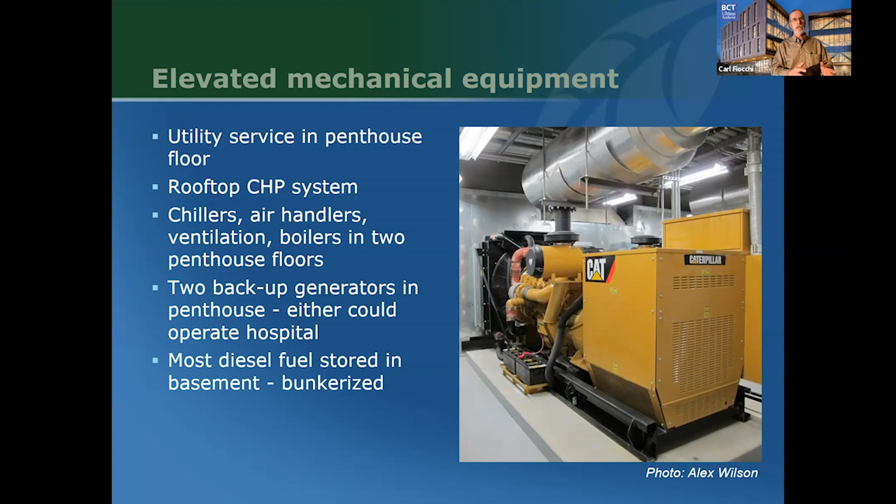I since then visited the replacement hospital in New Orleans that was sort of the motivation for the features used in Spalding. And I've got to say, I was disappointed touring that veterans hospital, because the resilience strategy they used there was just putting in massive backup generators and storing thousands and thousands of gallons of diesel fuel. They didn't really go to the level Spalding did in the building envelope.